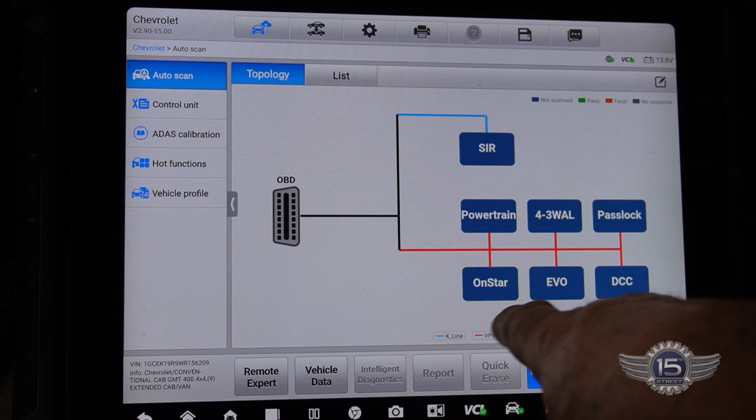Alright, pretty simple system. There's airbag, ECM, ABS, there's a pass lock. This old truck doesn't have an OnStar, so let's see what it's got for codes. No codes in the powertrain. Oh, we don't got no communication with the ABS. Huh.

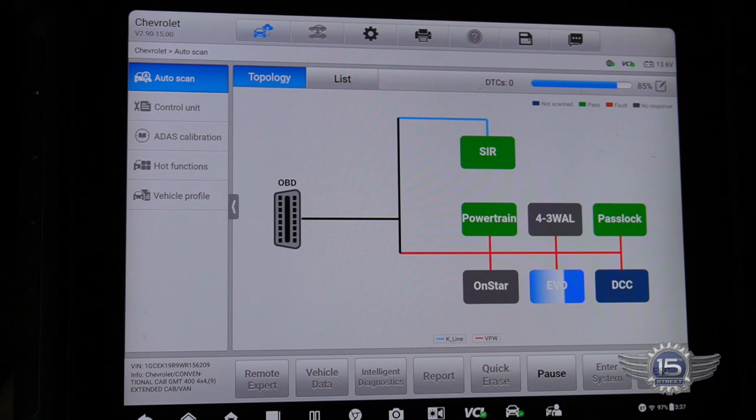Alright, well, there's no codes, and there's no codes in any of the other ones saying they can't communicate. But this is an old vehicle. I mean, this is 24 years old, so I'm not surprised. 25 years old. No communication with our ABS module.

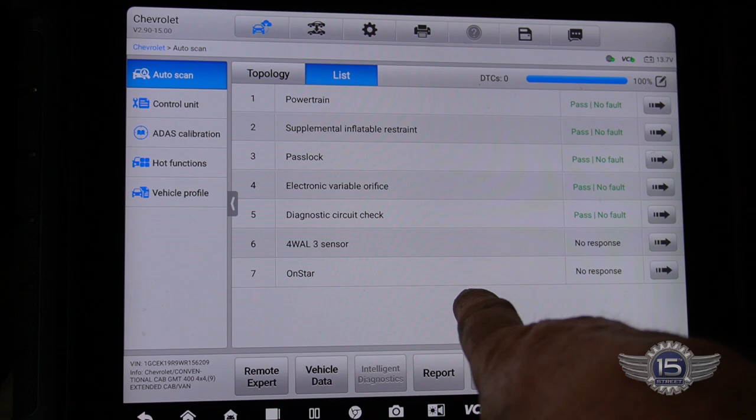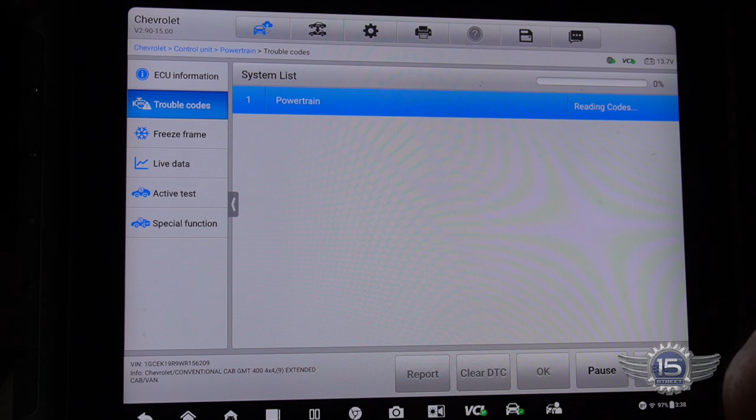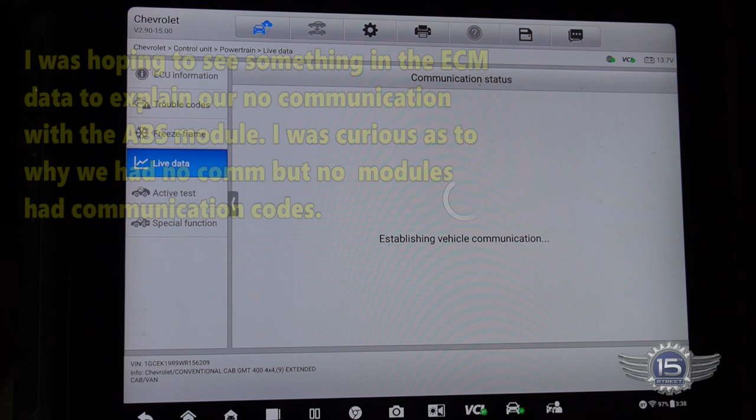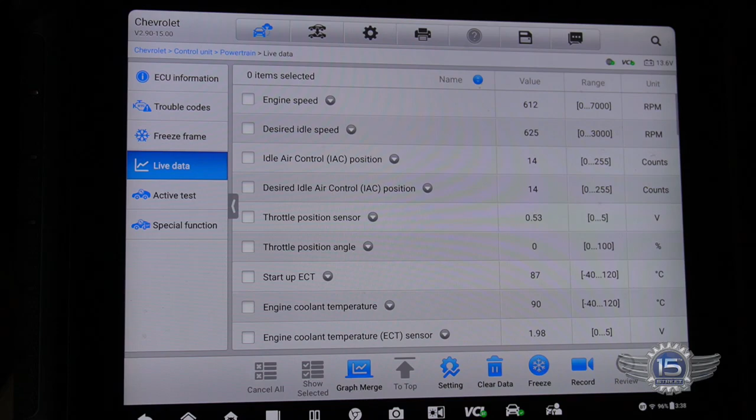Alright, so first thing we're going to have to do, no communication. Let's make sure we got power and grounds. And actually, it's class 2. Let's check the ALDL, see if we got our class 2 data, see what that looks like on pin 2 of the ALDL.

Alright, so I've got my breakout box attached to the ALDL here. I don't have the key on. I'm going to turn the key on here. So on these older trucks, class 2 communication, this isn't like the new CANs where you have 6 and 14. We've just got pin 2. That's the class 2 communication. You can see it blinking, so you know all the other modules are talking. So there's definitely traffic on that pin. But let's hook this up.

So we're going to put the ground in chassis ground, and we're going to put the blue connector in class 2. And then I'll pull up Pico here. So class 2 is a 7-volt square wave. There's only one wire, so it's not like CAN where you got them opposing. This is just one circuit. Here you can kind of see it. Hopefully you can see that. Let me pull you in a little bit here.

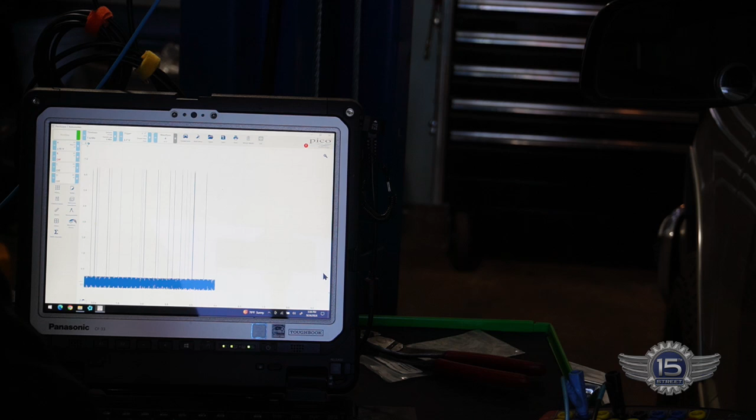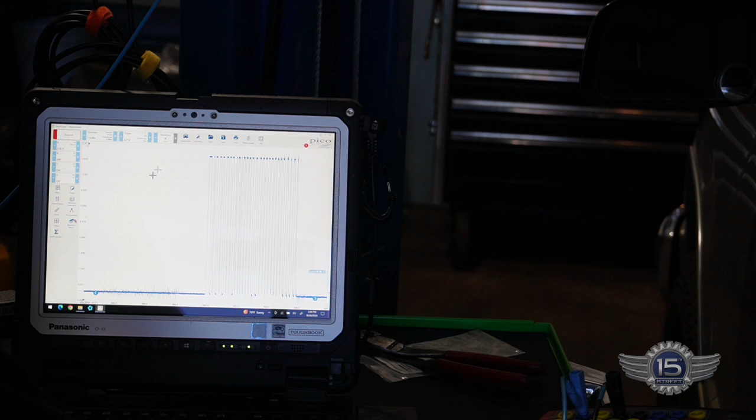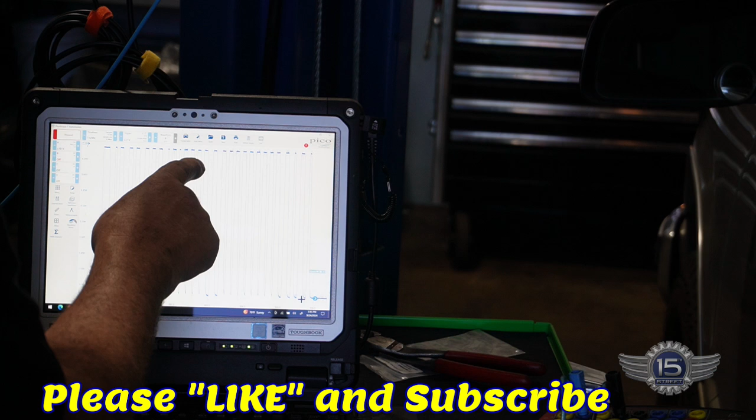So you can see here we've got a 7-volt square wave. So now if we stop that and we can zoom in there, let's zoom in on one of those packets. So that is basically a packet of information right there. There'll be 29 bumps. 1, 2, 3, 4, 5 ... 27, 28, 29. Yeah. 29 pulses to each packet. That's a textbook class 2 information signal.

So with nothing wrong with the bus, really all we can do is go to the ABS module. We're going to check for powers, grounds, and then make sure that that class 2 square wave is getting to the ABS module. It's just one wire going in. It doesn't have 2 circuits, one in and one out. It's just one in, and then the ABS module will make its communication on that one wire and just add to the signal from everybody else. So we need to check powers, grounds, and make sure we have a class 2 signal up there.

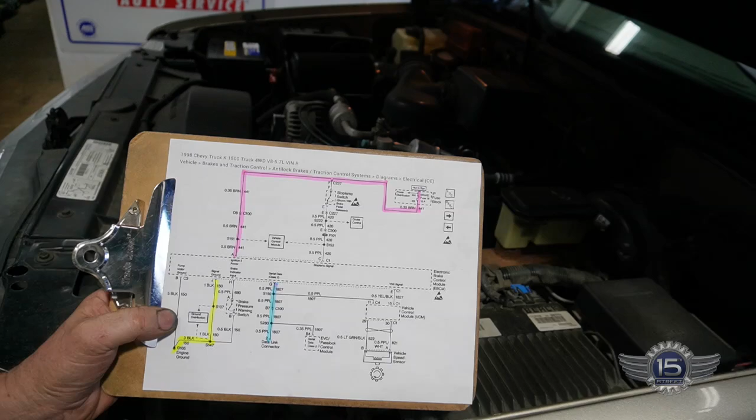On these trucks, the class 2, the whole network is a purple wire. So we're looking for a purple wire on that connector. So let's go up front and check that ABS control module. So here's the schematic that we're working on right here. So this is the EBCM, which is right here. Super easy to get to.

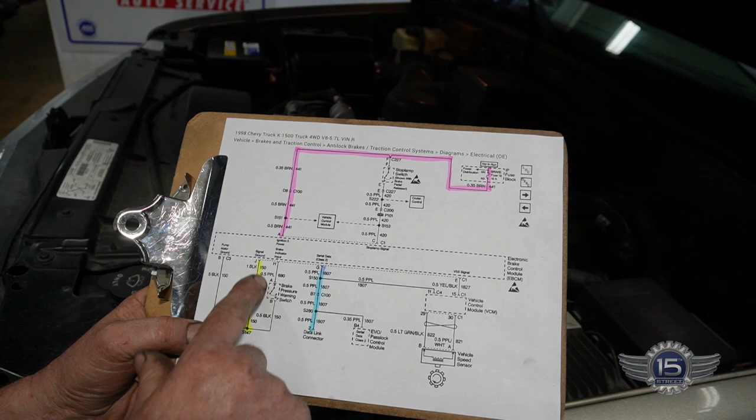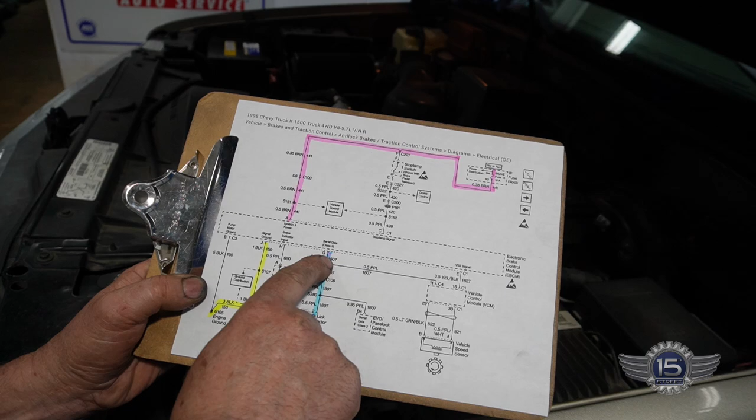Here's our schematic. So we're gonna have our power to the module on connector 1, pin A, on a brown circuit. We should have a ground on same connector, pin J, on a black wire. And then our communication should be on this purple wire here on pin G. So power, ground, and that square wave there. So we'll pull our scope over to see if we got our square wave on that. But we'll check pin A and J to see if it'll load a couple amps.

Okay, you're not going to really see this very well, but this is pin J, black wire, and over here is pin A, brown wire. So we've got the key on still, so we can back probe the brown wire and this black wire. Just make sure we got a good connection there.

And oop, I got a connection problem here. There we go. So we got good power there. That lights up. That's 4 amps right there. So if it can light that light, it can light that. It can power that EBCM.

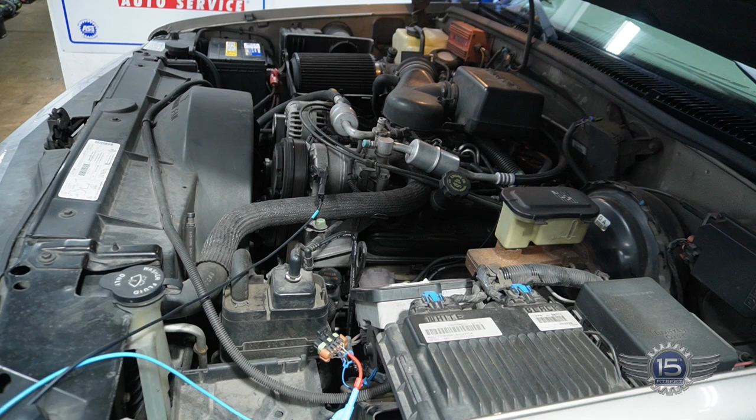Okay, now we need to check and see if we have our 7-volt signal. There's a couple purple wires in there, but only one of them's COM. So that's pin G right here, this second one. I need to make sure our... okay, I'm going into the purple wire pin G right here, back probing into it, and I'm going to make a good contact. I can feel it contact the back of that connector there, and I have no signal here.

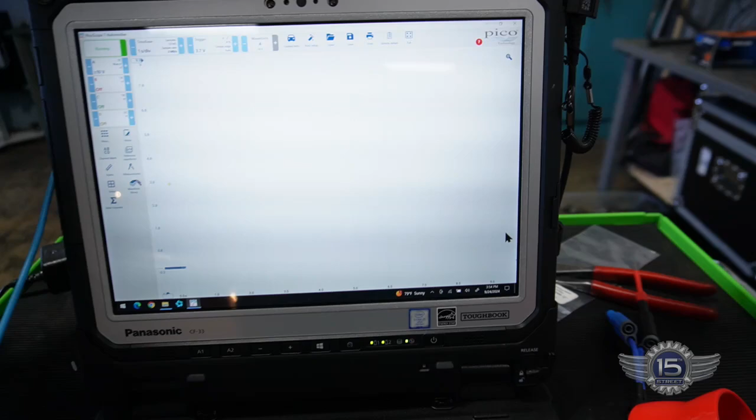Let me pull you around here. I'm in that circuit right now, and you can see I got nothing there. I got no communication in there. So signal's not getting to that EBCM.

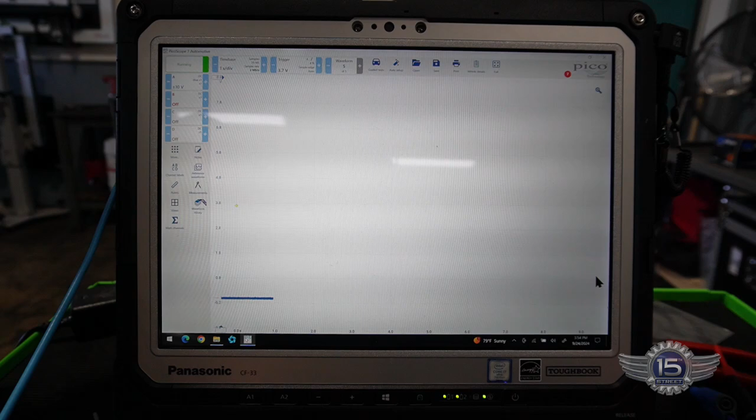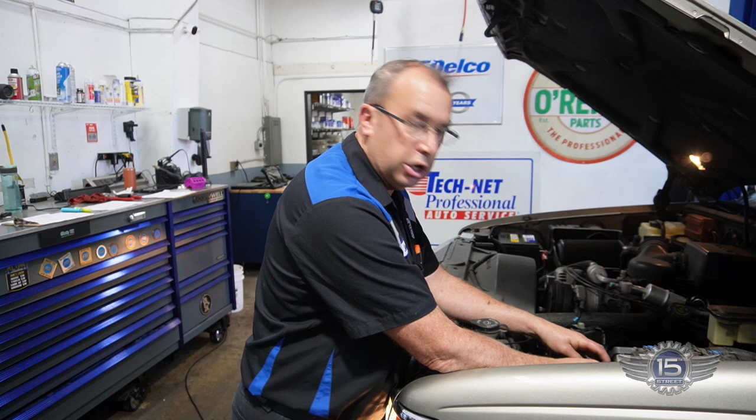Nothing there. Okay, so I've got a good connection here on that purple circuit, pin G, front probe, back probe. If I touch that front there without damaging the connector, obviously, I get nothing. There's nothing there at all.

Let me check my power here. Yep, if I hit that power circuit, my scope goes up to 12 volts. So the scope's working, we're just not getting a signal there. So we have communication on all of our other circuits.

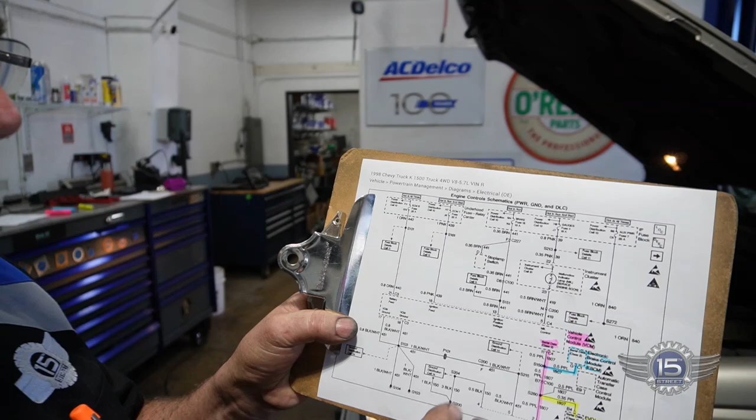So here's our communication circuit. Pretty simple, as far as vehicle communications goes. Here's our pin 2 on our ALDL. That goes to pin 11 of the vehicle control module, the PCM, and it branches off to the EBCM, and it branches off to the passlock control module. But because they're not in line like GM LAN would be, that can go bad and not affect anything else.

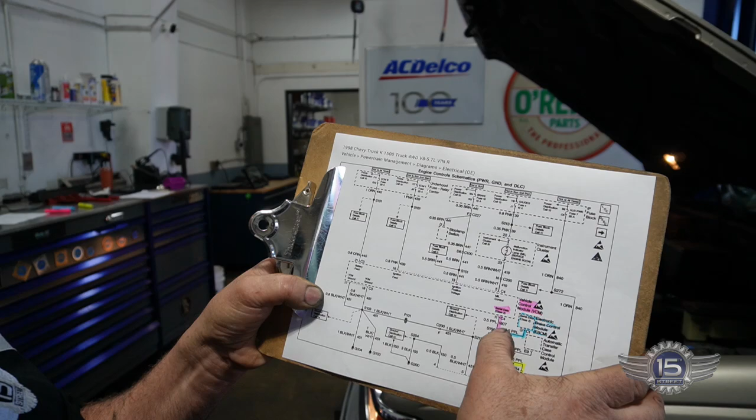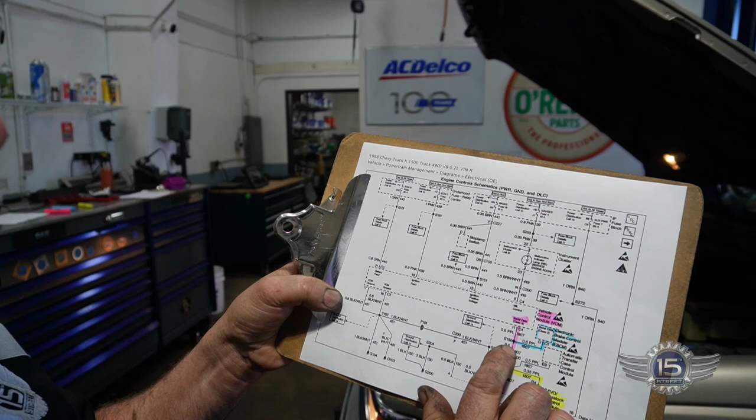We know that we can talk to passlock, so we know this circuit is good. We can talk to our VCM, so we know this circuit's good. So the break either has to be at the splice here or somewhere along this line, because we have it here because we're talking to the VCM. We don't have it here, so it's somewhere either at that splice or somewhere on that circuit. So we need to figure out where that circuit goes. We need to check splice number 150 to see where that is.

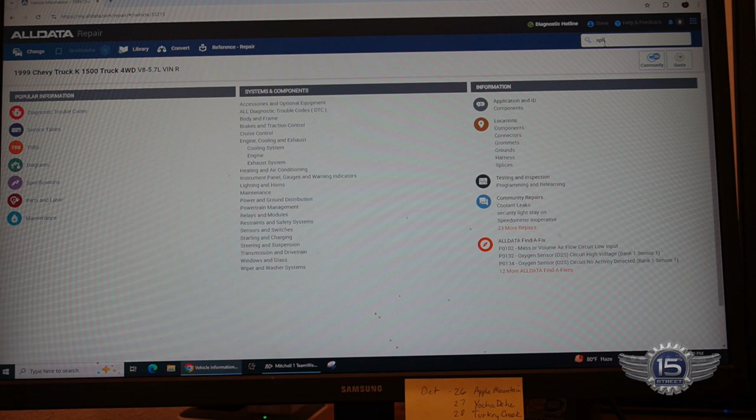We want to find where splice 150 is. So let's look at splice locations. Okay, splice 150 is our questionable one. Engine harness, approximately 5 inches from the EBCM breakout. Okay. So back to the truck, we'll see if we can trace that circuit up and find a splice there.

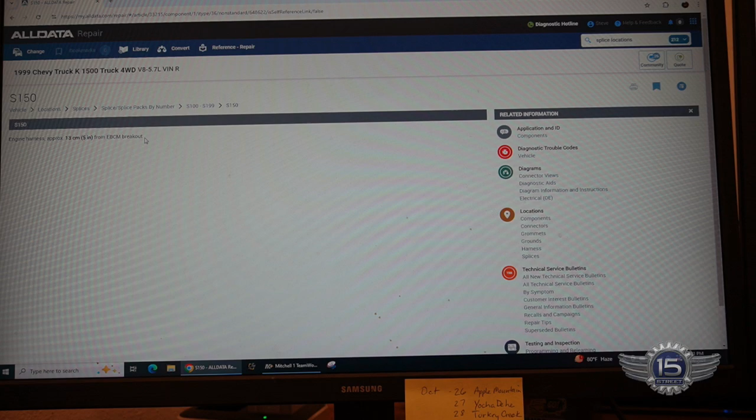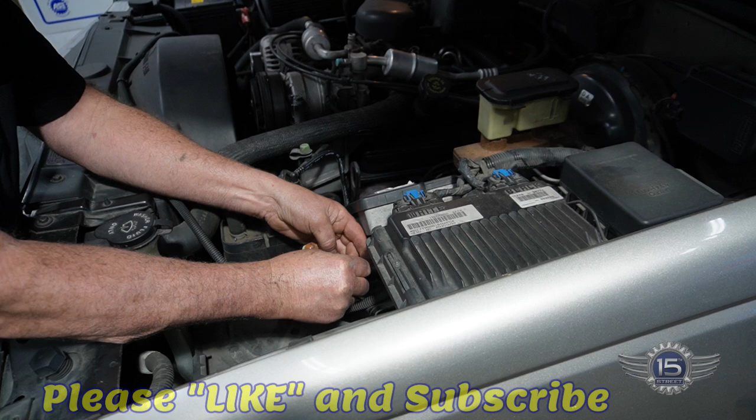So here is the harness for the EBCM, and I'm not sure what they're talking about with the breakout. It's either the breakout from the engine harness or the breakout from this harness here. So this is easier to get to. We're going to start here. Grab a knife here. We get in here, this all up here. Okay, open that up, open this all up.

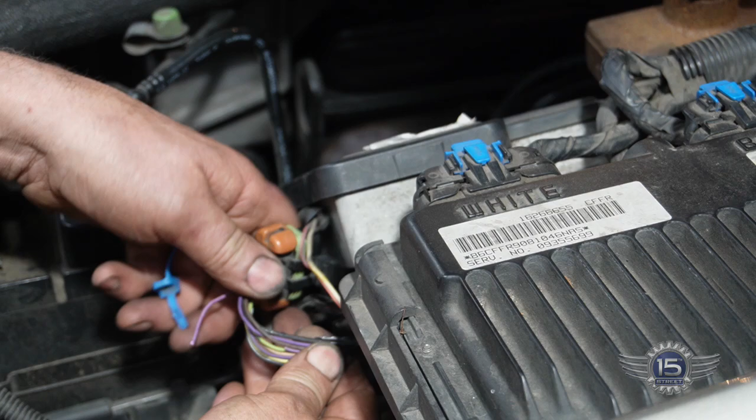It's either going to be right here or it's going to be right back there. But, oh, right there, it's right there. Broken wire, broken purple wire. If you look right here, right where that thing turns, it broke that circuit wire. And that is the class 2 COM for the ABS control module. We got lucky there.

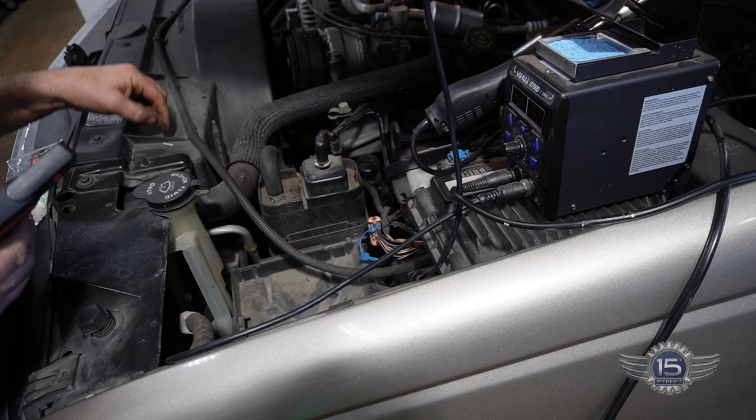Alright, so we're going to fix that and then see if we get our COM back. Okay, got all my soldering stuff here, so we'll clean all these up, get it all ready to repair this circuit.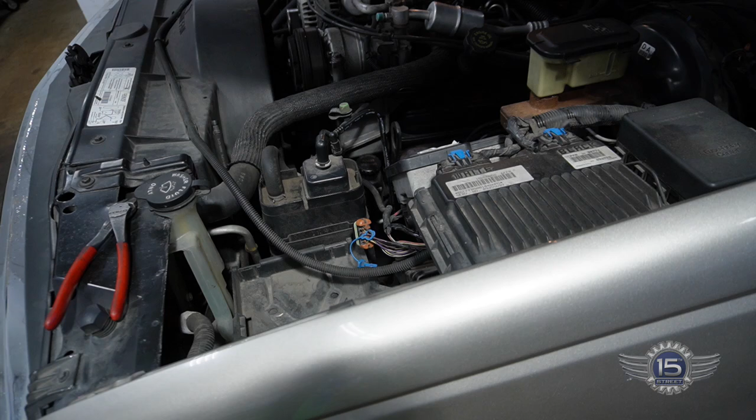Okay, so that'll protect that. Let me move this thing out of the way. Okay, so that will protect that circuit. Let me plug this in real quick and see if we got comm back.

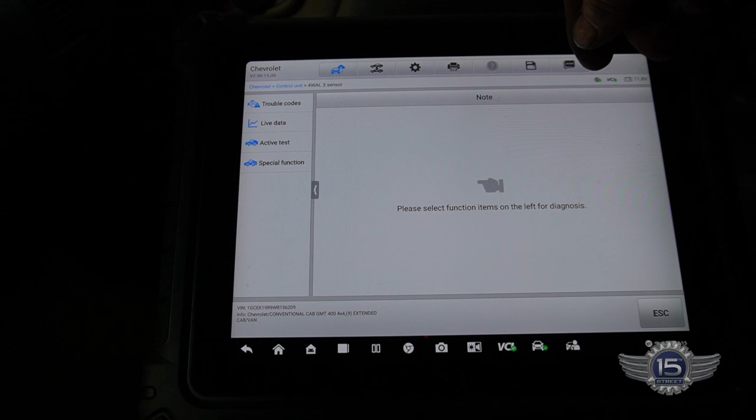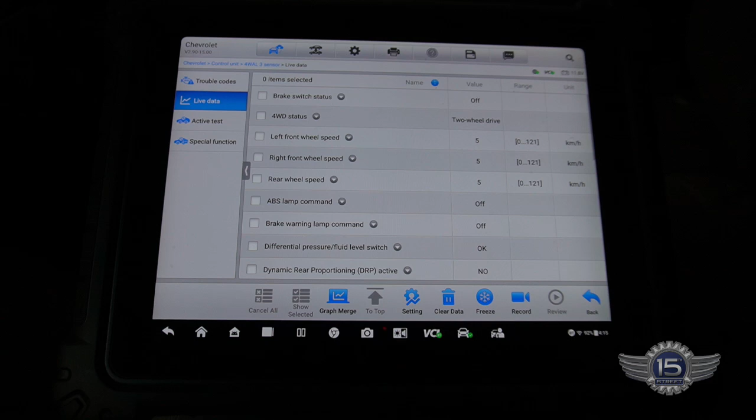Alright, so our ABS light is out. Did a bulb check and then went out, so that's a good thing. Let's check our scan data and see what we get here. Oh, we got our comm back. So that's what it was. No comm on the ABS control module. Broken wire right there at the bend. So that's going to be a fix.

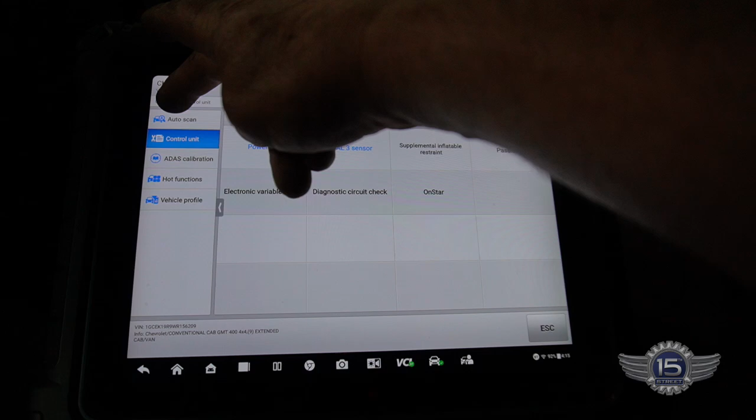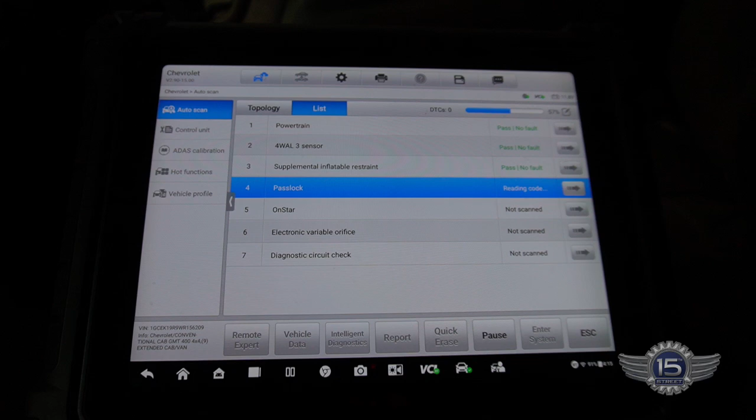Let's make sure we don't have any codes in here. Let's go back to auto scan. Fault scan. Ah, 4-wheel 3-sensor ABS, no faults. Awesome. Alright, so that one's going to be a fix. Let's finish taping up that harness and put this thing back together.

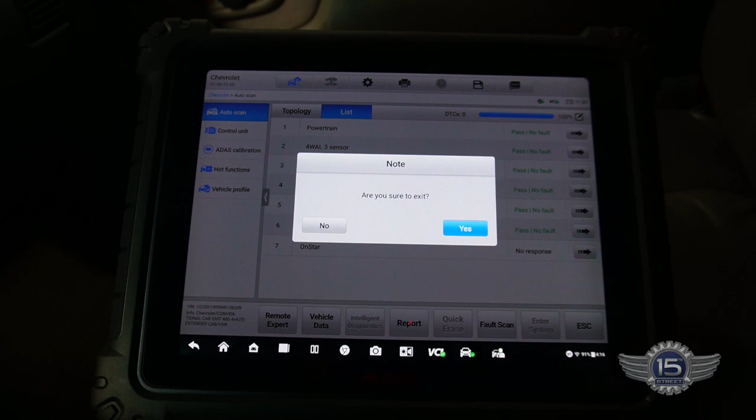Alright, we're going to tape this harness up again. Put this back in the loom here. Okay, I'm going to tape this secondary harness up here. Alright.

Alright, so we got this ABS light extinguished. The wire, over 25 years, has just been rattled back and forth, and on that bend it just broke. So got it all back together, got it all taped up, soldered up, so it should be good to go.